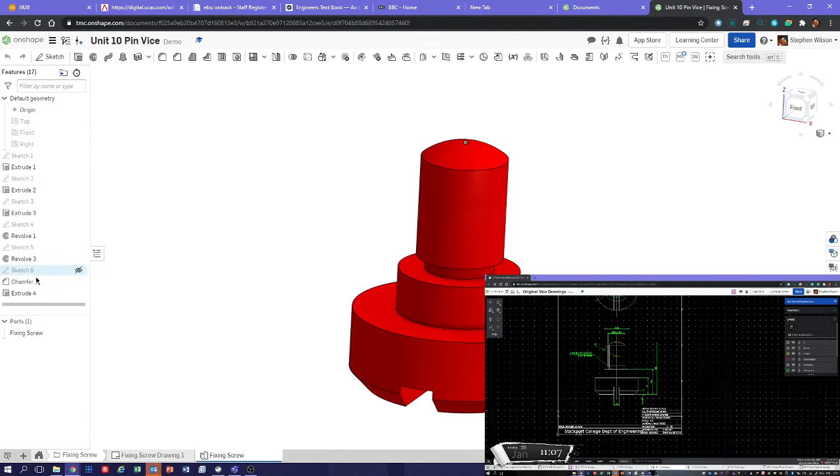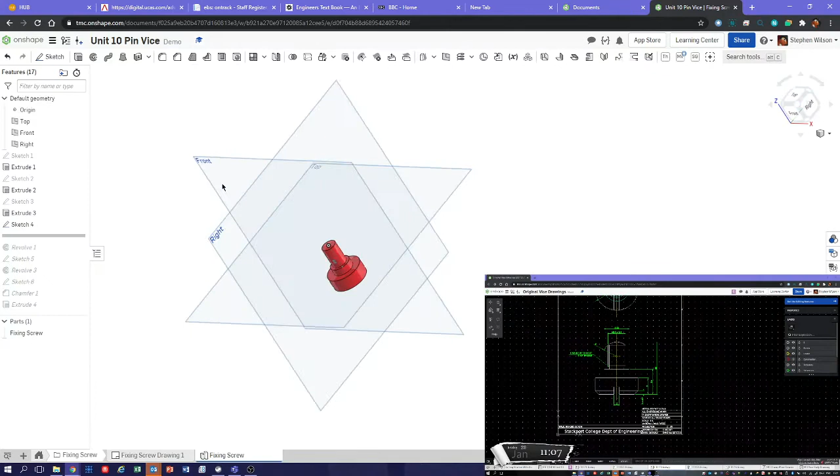Okay, so all I've done, we can see this here. I'll just roll it back to there. All I've done is a quick sketch. So let's just press P to bring up the planes. You can see I've done a quick sketch on the front plane there, because that goes through the centre of my part, or I could have done it on the right plane. The model may be different, but that's all we've done.

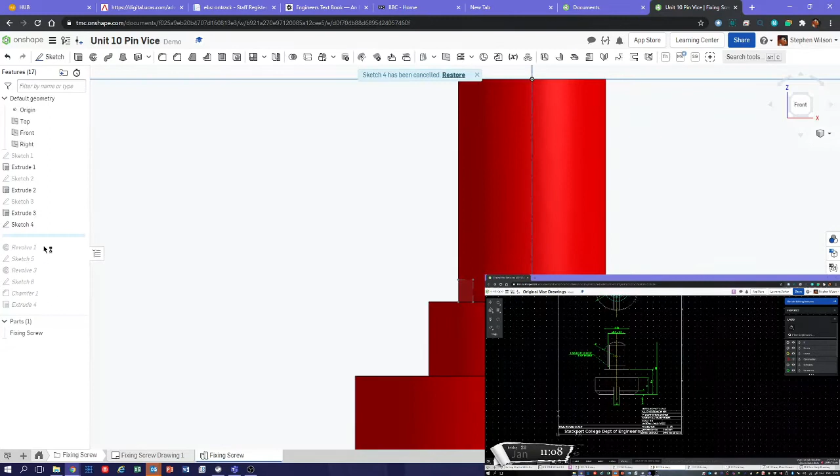So let's just hit N for normal to sketch plane. No, not that sketch plane. So there we are, N for normal to sketch plane, and just press P to get rid of the planes. So I've just done a little rectangle there on that edge. And then all I've done from there is revolve, remove, extrude, remove, revolve, remove, and that's just taken it out. It's mostly a cosmetic thing really.

And then over on the drawing, I've labelled that as M10 by 1.5, and I've just done that with a note there. So we can just pick a point on the surface, and then we can type whatever we like, and we can insert symbols like diameter or degrees there. Okay, so that's how we do that. So undercut to thread diameter is just there.

Now the next thing we need to do is put these tram lines on. If we just go over to here, we've got the tram lines that represent where we put our zigzag, where the zigzags would be of the screw thread. So what does that look like? How do we do that?

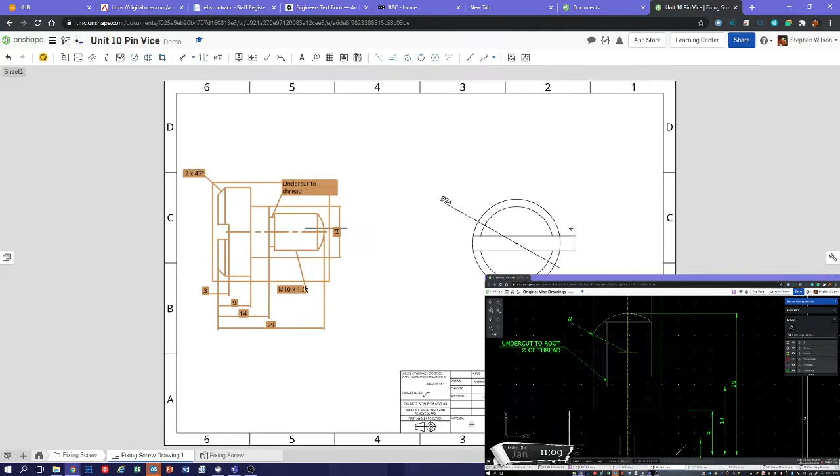Well, the easiest way to fudge this is when we've got everything in place and we're happy with our drawing, we can just draw in a couple of lines like this. Okay, which is an acceptable solution. Problem with that is you've got to make sure you select it when you move, otherwise it won't move with your part.

So, oops daisy, what's going on there? Oh, let's just redo that, let's just bring that back in. There we go, yeah, so now obviously that would move together. You've just got to be aware of that. So that's one solution.

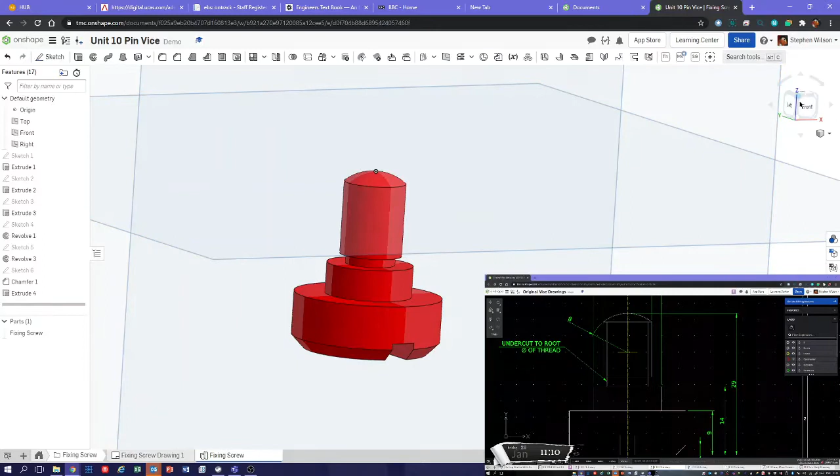A slightly more permanent solution would be to do a sketch on the actual drawing. So there's our front view. I'm just going to do a quick sketch here, and select my front view as the sketch plane there. Normal to sketch plane, just move it into view. I'm going to first bring in these lines for my sketch, then draw a couple of lines from there to there, escape, another line from there to there. Okay, and then we're just going to very quickly dimension those up at 1mm and 1mm.

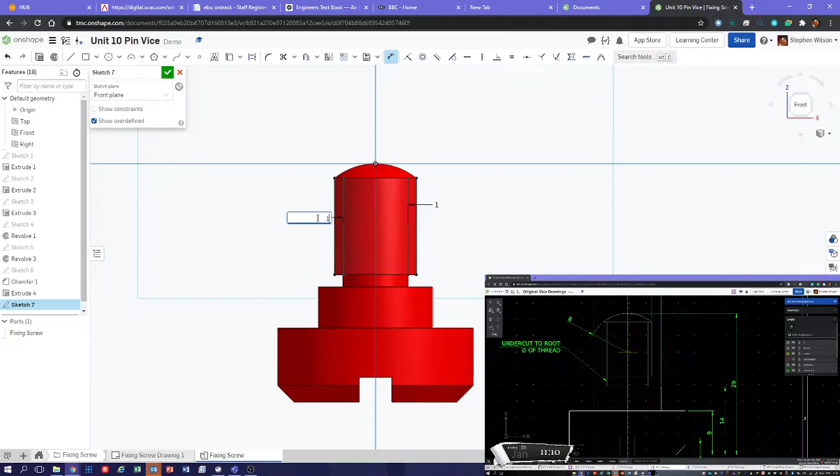Okay, so that's a very quick sketch that we've just done there. And I'm going to go back to my drawing, and hit the refresh button, because the drawing needs to be aware of that sketch that we've just done. So until we hit the refresh button, it won't see that new sketch. I'm just going to hit the refresh button there.

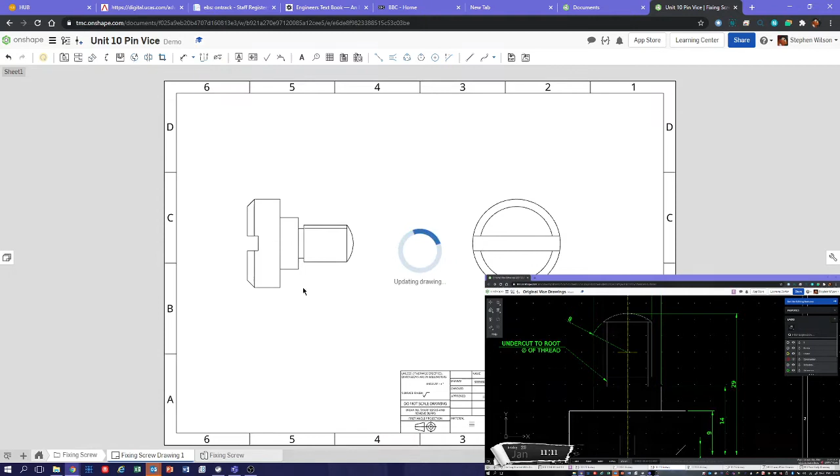Wait a second or two, and a little bit longer. I should probably pause while it's doing this, shouldn't I? That'd be a good thing to do. And then, oh, there we go. Right, okay, so let's delete that.

So then I'm going to right click. Oh, come on, there we go. And you see it says show hide sketches, so I'm just going to select show hide sketches. And then I'm going to select the last sketch we did, sketch 7. I'm going to hit the tick button, and then with a bit of luck, just wait for it.

And there we are. So we can see we've got those lines in place now. They're obviously part of the drawing, so they move wherever we go. So that's another way you can tackle that.

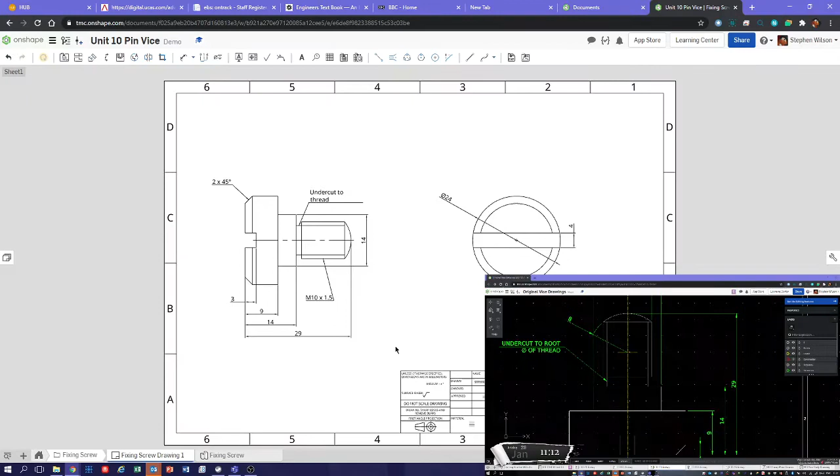Okay, so that's one question that's been asked of me quite regularly. And if we flick over to this drawing here, people have also said, well, how do we get that line there? How do we make sure the tram line, the thread, only comes down that far? And this one, it's a bit more useful doing it this way.

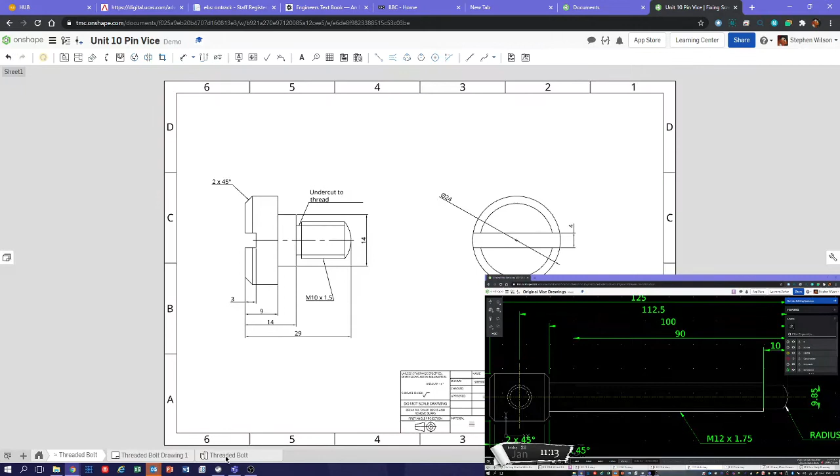Because if we put the sketch up in the drawing, then we can actually dimension, we can actually use that as a point to dimension. So we need that 90 there, because that tells us when the thread stops. So if we go to the threaded bolt, as I think I've called it, then we can see how we do that.

So once more, I've put a cosmetic thread on there. And yeah, so you can see, what I've done is I have created a plane. So let's just press P to... oh dear, quite a lot of planes there. So have I created a plane? Yes, I've created a plane, sketch plane 3.

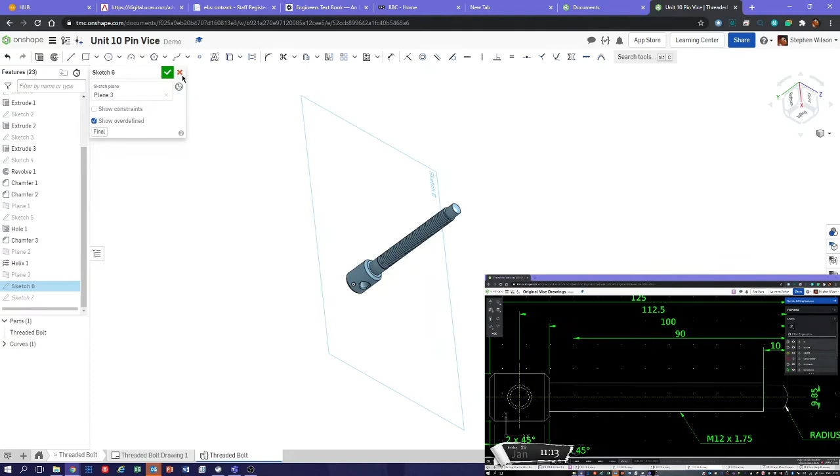Okay, so let's just roll back and see how we do that. Yeah, so what did I do? Well, we've got the create plane button here, and we've got various options.

Yeah, so we can offset plane, point - there's one of the Onshape videos that goes through this very well and lets you know what to do. But we've got offset, plane point angle. Okay, so that's this button up here, plane.

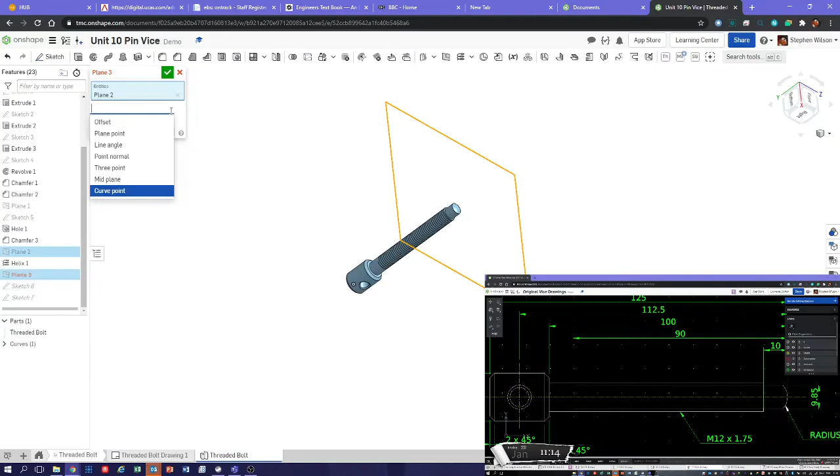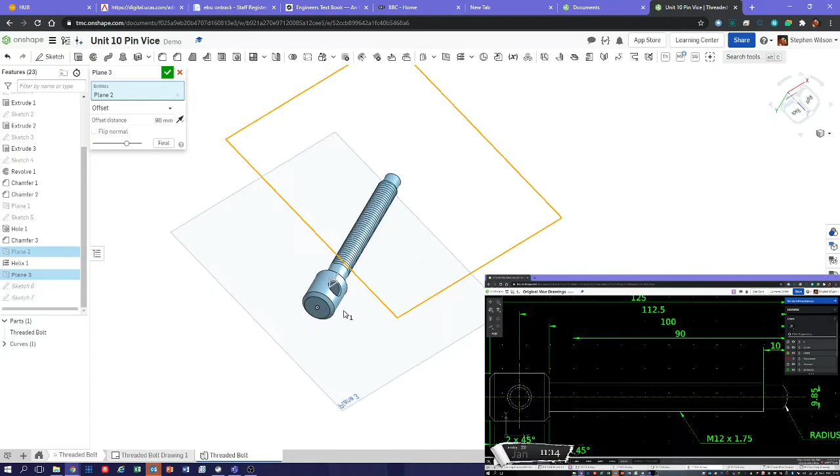So we're just going for an offset, and all I've done is offset from a previous plane I've made. But you could pick - I don't know why I made a previous plane, it's been a long time since I've come to this drawing - but you could pick this face here as your plane to offset, or you could pick one of the default faces, your top, your front plane there. And then I've offset the plane to the point where I want my thread to stop.

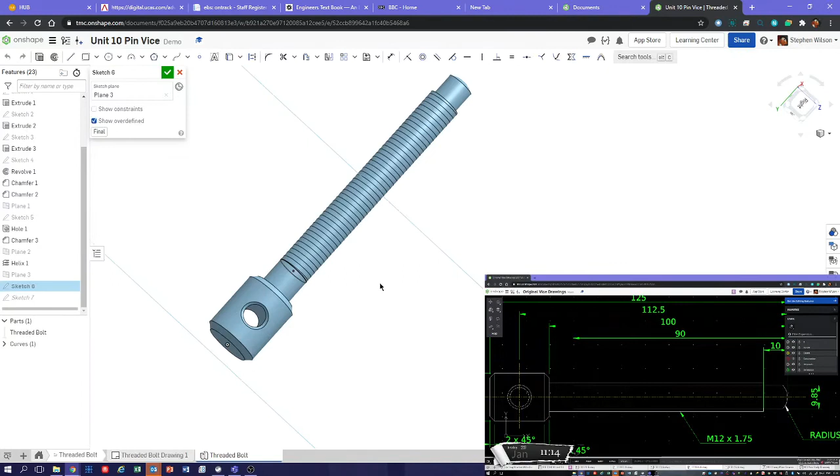Okay, so now that I've got a plane, I can do a drawing on my plane. I've put a piece of paper there, and all I've done is just put a circle there. And obviously when we look at that circle from the right side, what we see is a straight line, and that's what will show up in the drawing. So on my plane, I've just drawn a circle the same diameter as the main shaft there, just from the center point.

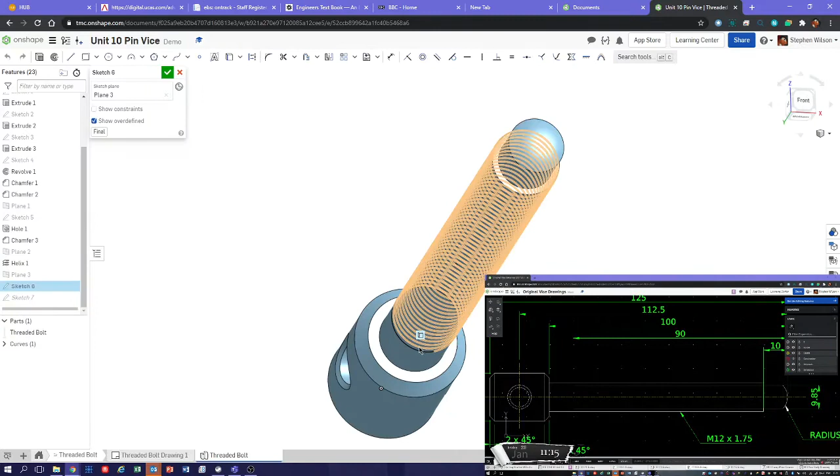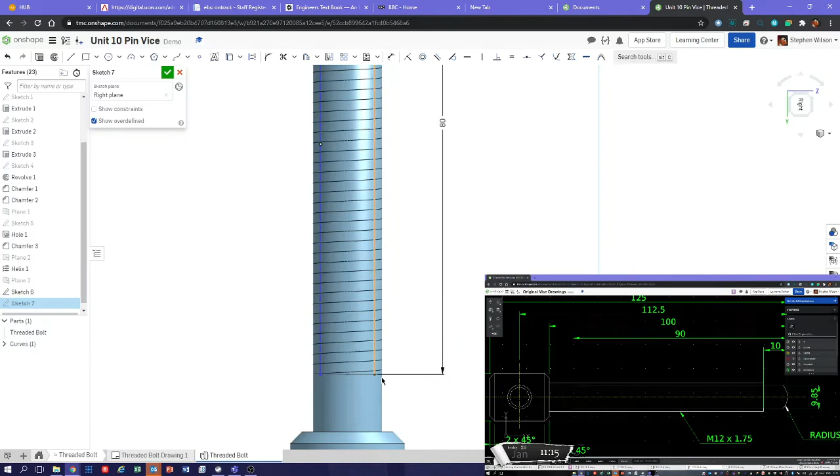Okay, so that's what we've done there, and then I've also done a sketch on the right plane, which goes through the middle of this part, and like before, I've just done my 2 center lines, but then they can come down. If I show the sketch there, you'll see that they link to that sketch. Yeah, and then I've just dimensioned them the same as well.

Okay, so that's how we've done that, but then that means - every day we're buffering, oh dear, I need to get the internet sorted.

And that means that we can then use these points for dimensions. So you can see that 90 actually dimensions to that sketch circle that we had. So it makes it much more a part of the model, which is useful - easy for me to say - which is useful for dimensioning. So hopefully that helps you there.

Was there anything else that people have been commonly asking me? Just remember that this is actually 2 parts. It doesn't say it, it says T-bar - it should say T-bar and end thing, shouldn't it, on the title, to give you more of a hint. But that's obviously not a projection of that, it's not lined up or anything, so it's a second part on the same drawing.

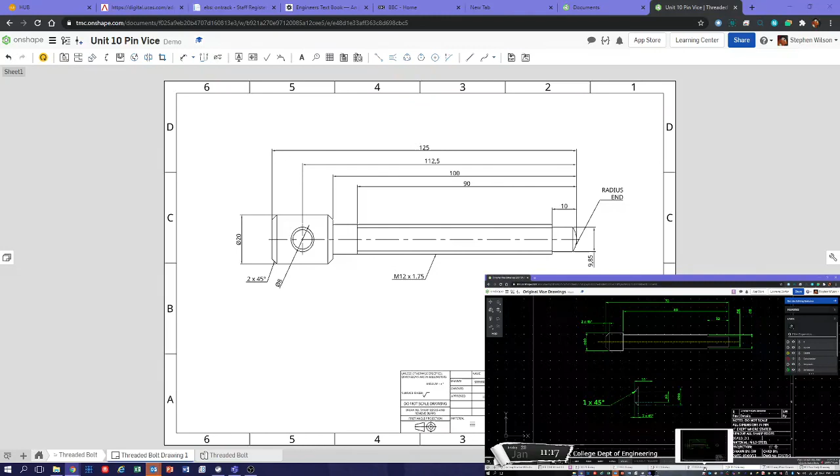And the blue dotted lines - people keep saying you've not said what the lines are. Well, they're dot lines, which means they're hidden detail. So what might that represent? Well, it's a diameter, it's hidden, so it's a hole through the middle, isn't it? So as people keep asking that, let's have a look. I don't think there's anything else major that people keep asking.